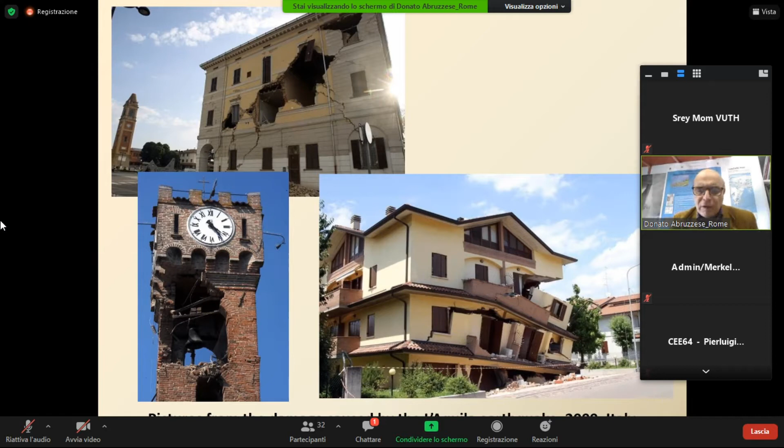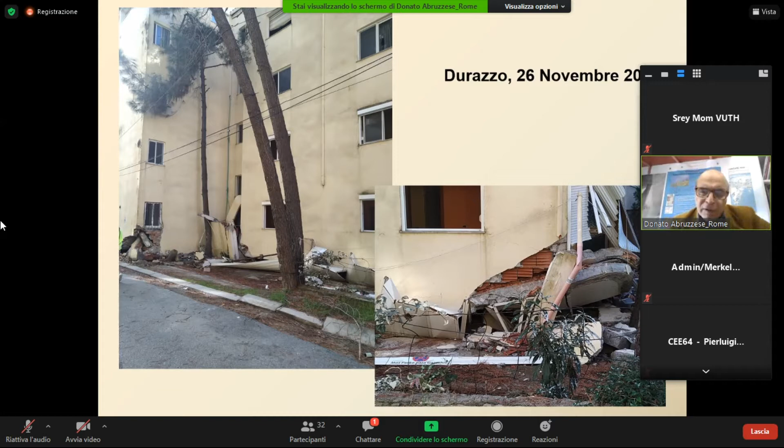We can always start from the earthquake. They are in our mind in Italy, in Albania, in all our Mediterranean area. We are suffering these things, and so we are going to face the problems related to earthquakes. Last year I was in Albania, and I had a chance to visit places like Durazzo and Tirana, thanks to my friend from Polis University. And I had to see what happened there.

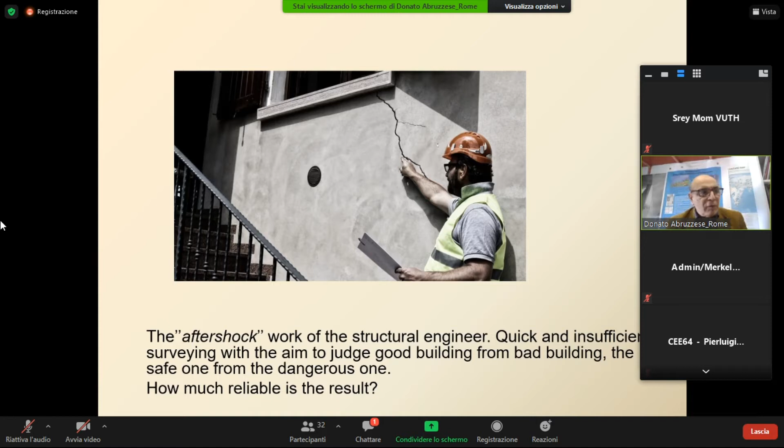What is terrible is that we often cannot imagine the situation of the buildings. Often, as structural engineers, we are called to go on site and do this kind of aftershock work, and try to imagine, just from a survey from outside, just looking from outside, what the situation of the building is.

We need to have a sort of magic stick, like in a little fairy tale, to understand what is inside the building. So this is very difficult. I have done this for several years, and I feel very frustrated sometimes because we cannot get more deep information.

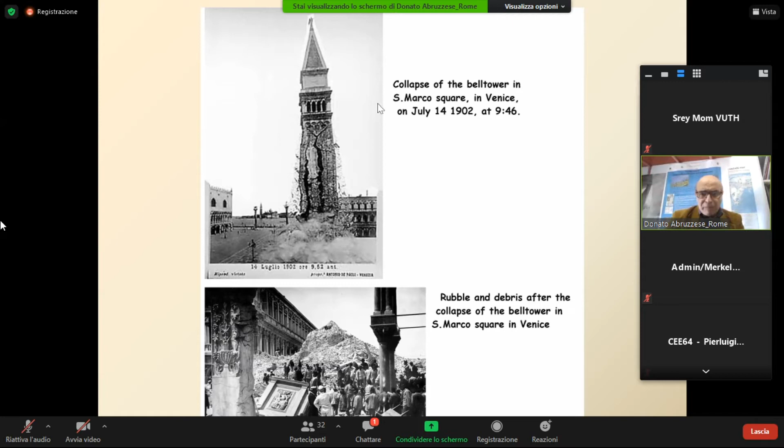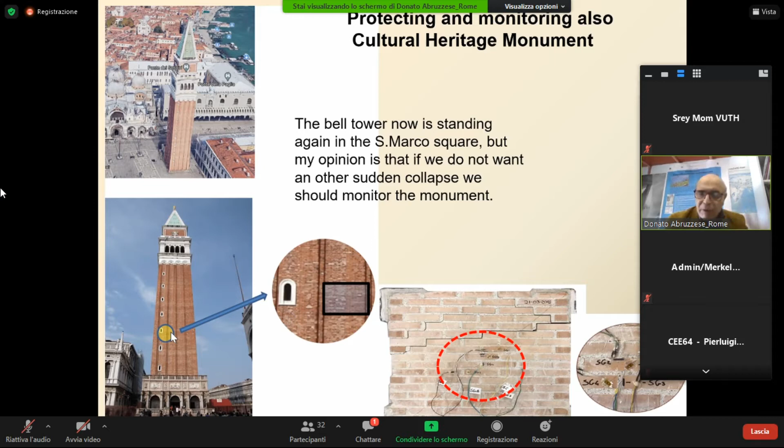Let's look for a moment at a situation in Venice. We had this sudden collapse of the bell tower at the beginning of the last century. My idea is that, now that we have a lot of technology, I would like to have sensors there that could give me some information about what happened. If I could put a little ear there, probably I could feel more confident, and I could also give more safety to the structure.

My dream is to have comprehensive knowledge about the structure, and to see the situation of the frame, of the beams, of the columns, everything. Why can I not get acceleration, stress, strain, temperature, humidity, even the condition of the corrosion of the bar? This is very important. We know how important the situation is.

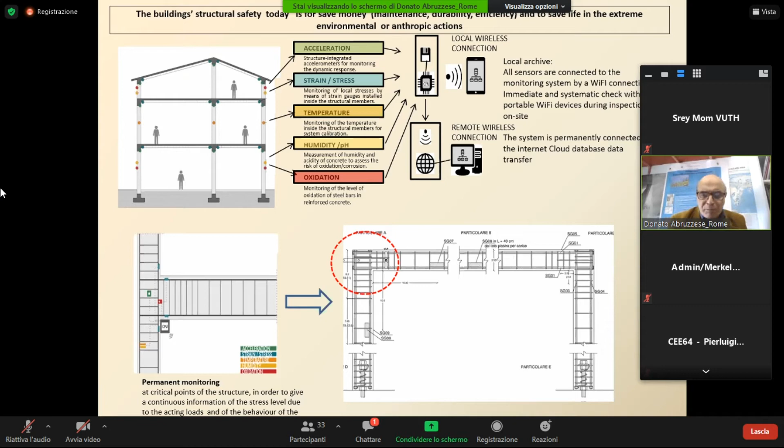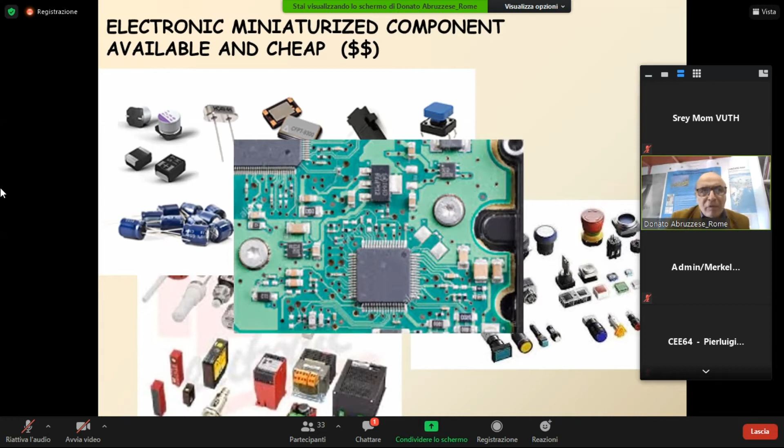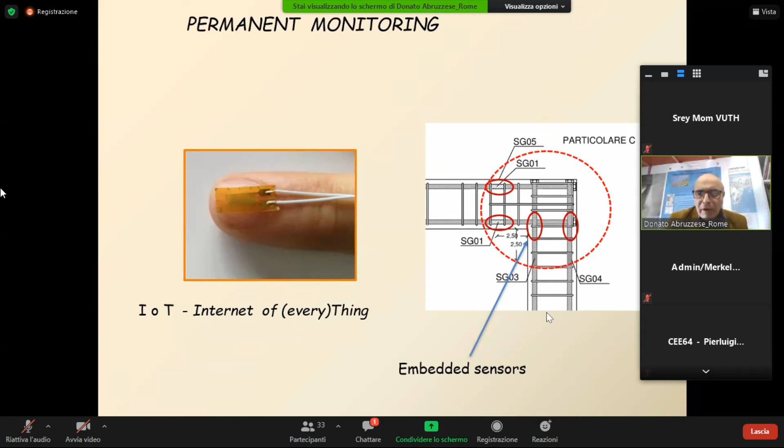So what we are going to see is that we can now use this kind of technology. It's called IoT, but it's based on electronics. Electronics have now become so cheap, and can also perform permanent monitoring. We can have very little sensors that are cheap and affordable, and also not so disturbing to the structure. So we can also use embedded sensors. This is very important. That's why we say Internet of Things.

We know that people are accustomed to Alexa. Alexa is a sort of domotic king of the house. It can manage the temperature of the house, the lights, can turn on the TV, probably the washing machine or everything else. But my idea is I want to get this inside a structure. So I want to make a smarter building with this kind of technology.

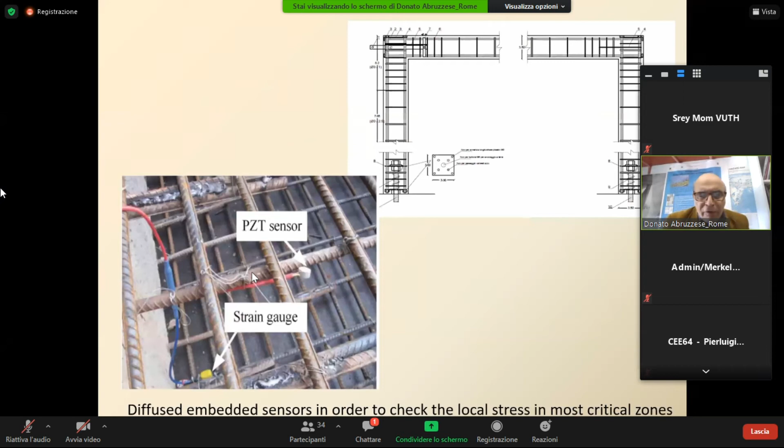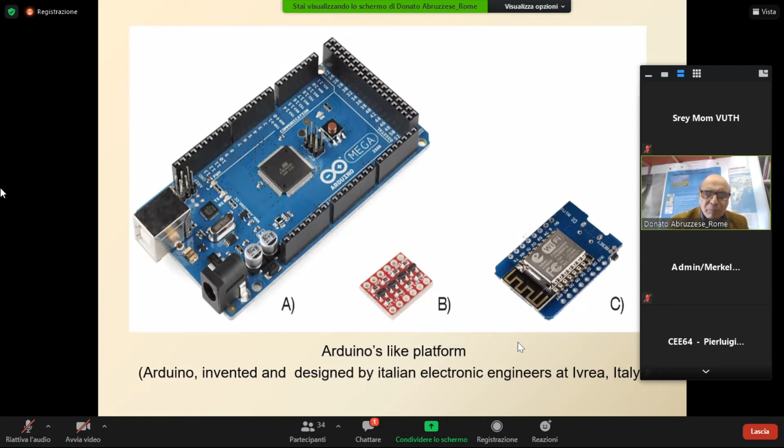For instance, I want to put inside a bar something that can record every single second what the situation of the bar in the frame is, with just some little components that can easily be related to the Arduino platform. I just remind you that Arduino is an Italian project from Ivrea.

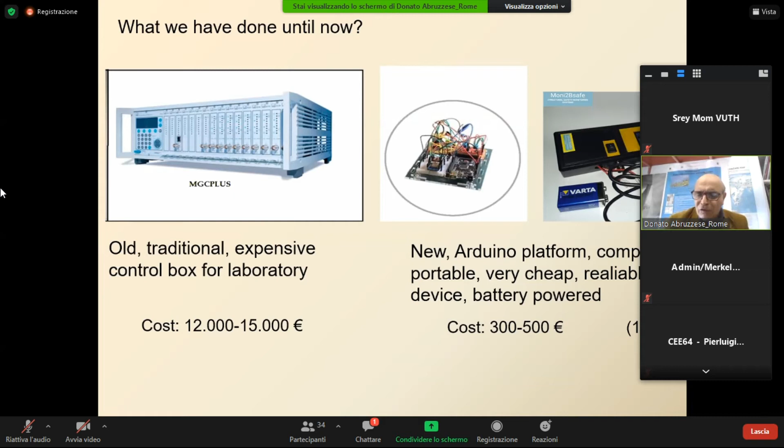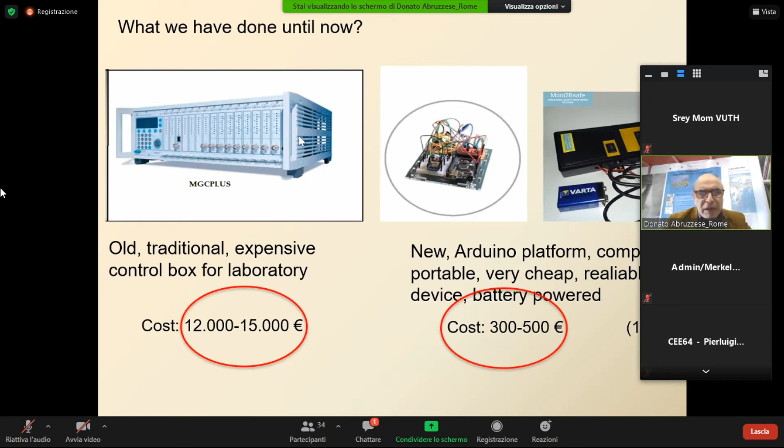What we are doing can be pretty interesting. We are going to retire this big box that costs thousands of euros, and build very little things on this platform that can control the stress and strain of the tests we are doing. I compared these two devices, one very expensive, the other very cheap. One is very heavy, about 20 kilos. The other one is less than 100 grams.

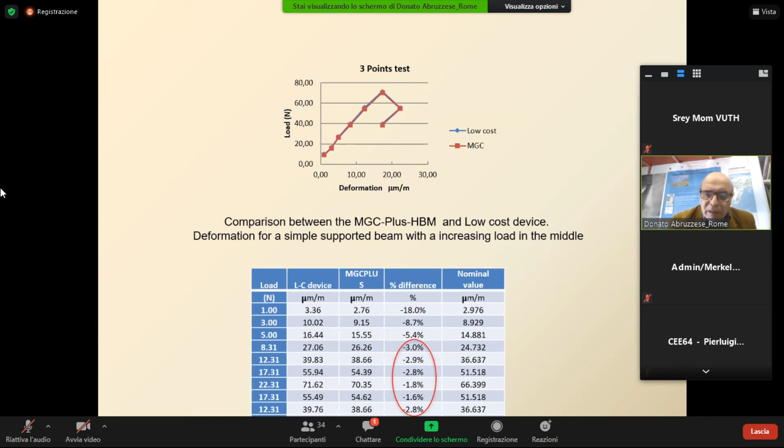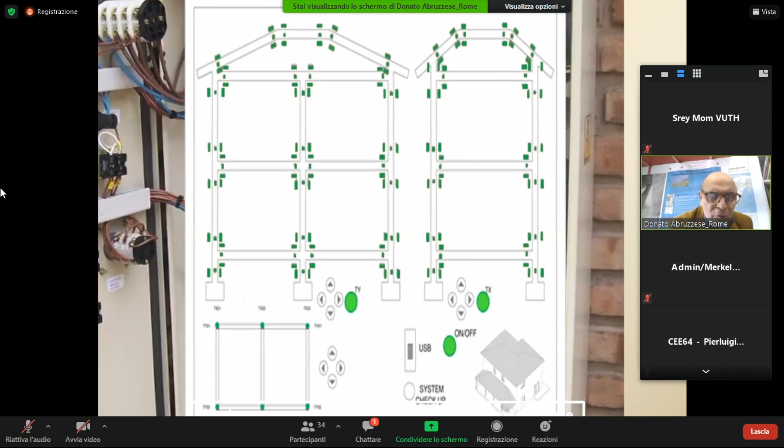So my idea is to have a sort of box in the basement of my house where I can check time after time what the situation is. And I can get a red light or a green light to know where the problem is.

With this kind of research, we are exceeding our field of civil engineering. This is not an invasion of another field, electronics. We're just using some tools. But it's important to know these tools and how to manage them. We want to use this because it's very cheap. It's also important that we can have remote control, and make it permanent. Permanent means all the life.

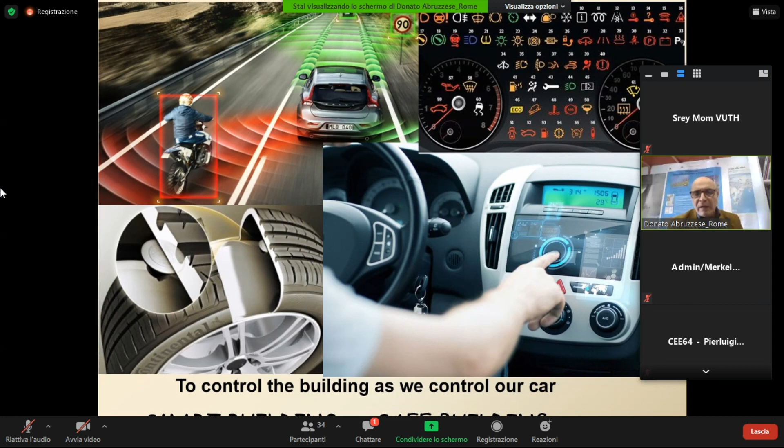The idea is that when the building is born, it should have this little system with it, just like we have with the car. The car gives you control over everything; even when you sit, you have sensors that suggest you put on your safety belt. So this is the idea. We want to have a building like a car. A smart building means a safer building.